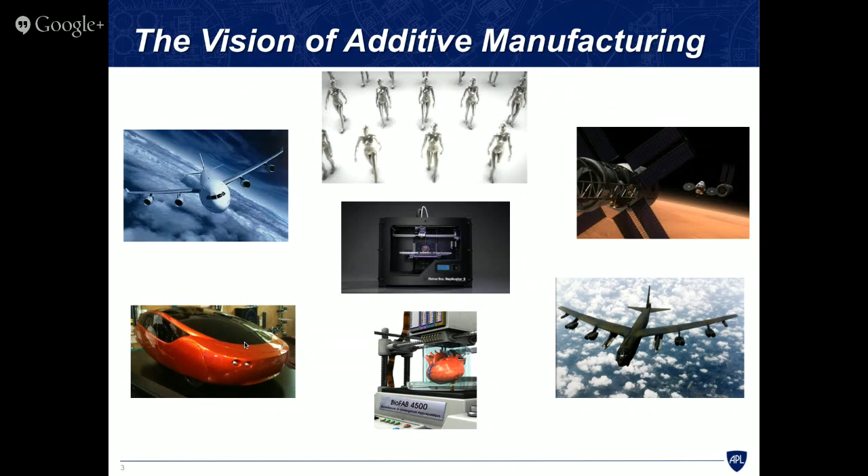And of course, my favorite is robots, right? People have talked about it—we're going to print robots. We're going to be able to print the exoskeleton, the circuitry, the outer skin, and the software all at once, all in the same machine. And when we're done, the robot's going to knock on the door and say, 'Let me out,' right? This is the vision, this is what people talk about when they say additive manufacturing. You don't have to look very far to see that this area gets significant media visibility.

This is actually a pretty old slide now, a couple of years old, but these were some of the things that were in the press, the popular press, and some of the trade journals, 3 and 4 years ago. You can look in the paper or on the net pretty much every day and see something new about additive manufacturing. It's getting significant visibility, and people are saying some pretty remarkable things.

Complexity is free, right? Doesn't matter how complex your part is, we can make it, no problem. One day we're going to print an engine, metal engine, no problem, we'll do it right here in the garage, right? We're going to go right from art to part. One of my favorites, I'll tell you later why I love that one so much. Or additive is the third industrial revolution. Well, what does that even mean?

So these are the types of things, and you've probably heard statements like this or similar statements about that. There's a lot of hype about additive manufacturing.

My favorite quote when it comes to additive manufacturing is this one from Jeremy Hsu, who had this in an article in Tech News Daily a few years ago, where he says, "The technology could end up affecting every major industry and have an even bigger impact on US manufacturing than the robot revolution." So think about that for a minute. Not just select industries, every single industry.

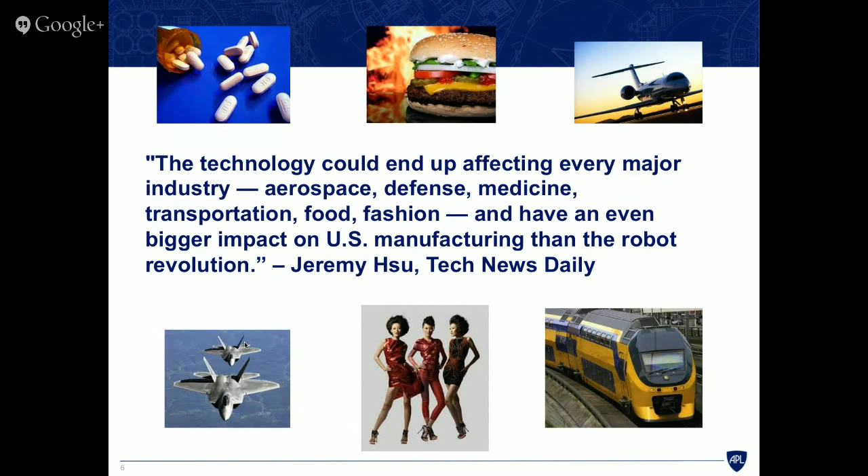And so if you were to think about it for a few minutes and come up with a list of those technologies in the past 200 or 300 years that have affected every single industry, you'd have a very short list. Electricity, the personal computer, the internet, okay, those types of things. How many things would be on that list? 5, 6 maybe, okay? Additive manufacturing has the potential to be listed with those other technologies.

And along with all the hype and the growing hype, we see a rapidly growing additive manufacturing industry. So if you look back a few years ago, in 2011, there were 1,600 articles published on additive manufacturing or 3D printing, okay? A year later, there were 10 times that. I don't have statistics on the last couple of years, but a 10-fold increase in just 1 year. For those of you who are familiar with Kickstarter, this is one of those crowd-funded projects. 3 of the top 10 Kickstarter projects are 3D printers.

The total additive market in 2009 was $1 billion, and 2 years ago, it was 3.1 billion. Now, a couple weeks ago, I had to update this slide, and I sort of chuckled when I looked at the predicted worldwide sales of products and services. So just 2 years ago, when I originally had this slide, they predicted that in 2016, it would be a $3 billion market. Well, we've already surpassed that. The new figure for 2016 is 7 billion. And for 2020, just a few years ago, they were predicting 5 billion, and now they're predicting $21 billion. So the market is growing very rapidly.

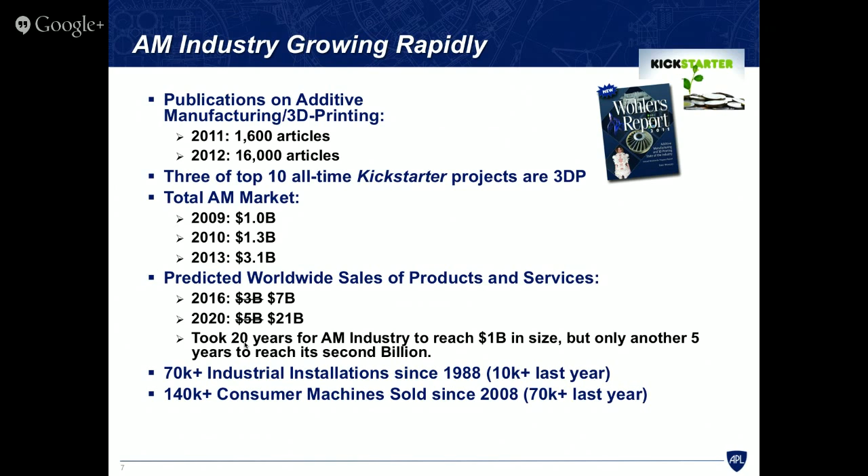It took 20 years for the industry to reach its first billion in size, but only another 5 to reach its second billion. And then if you look at the number of machines that are out there, there are 70,000 industrial machines that have been sold and installed since 1988. By industrial machines, we mean machines that cost more than $5,000. And of those 70,000, over 10,000 were just last year. Similarly, if you look at the consumer market, these are machines that are less than $5,000, the types you would buy yourself and have in your garage or basement. There have been 140,000 consumer machines sold since 2008, but over half of those were last year. So along with the hype, we see a very rapidly growing industry and market.

I like to show this as well. I don't know how many of you are familiar with the Gartner hype cycle, where he looks at various technologies and starts with an innovation trigger, a peak, what he calls a peak of inflated expectations, and then the trough of disillusionment, right? It's sort of when you wake up and realize what's going on. And then the slope of enlightenment that finally gets you to some stable plateau of productivity.

And he's put on here a few additive manufacturing or 3D printing technologies. 3D bioprinting systems is sort of on the rise right now, which I tend to agree with, although he says it's going to plateau in 5 to 10 years, which might be a little optimistic. And then over here on the enterprise 3D printing, which I think is referring to the more industrial systems, he says that we've already passed through this trough of disillusionment.

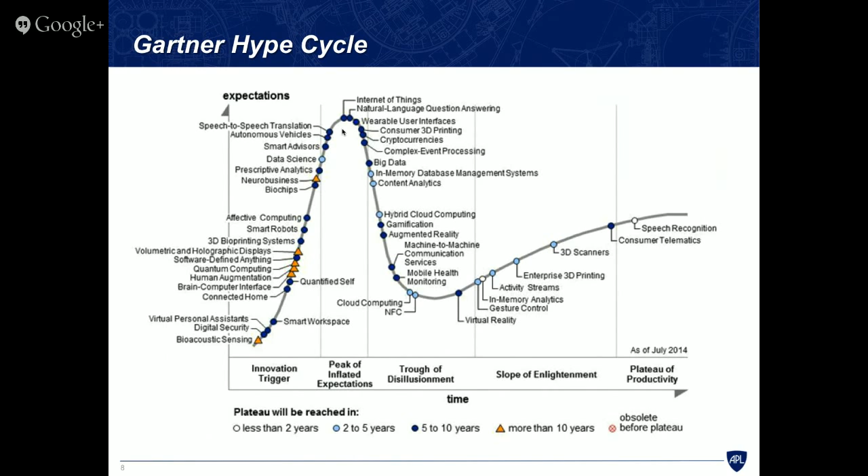It's going to be 2 to 5 years, which again, I think is a little bit optimistic. But the interesting one is up here: consumer 3D printing, where we're still very close to the peak. We still have a lot of hype, a lot of hopes and dreams for additive manufacturing or for 3D printing. So the question is, how bad is the crash going to be when some people are finally able to separate the hype from the reality?

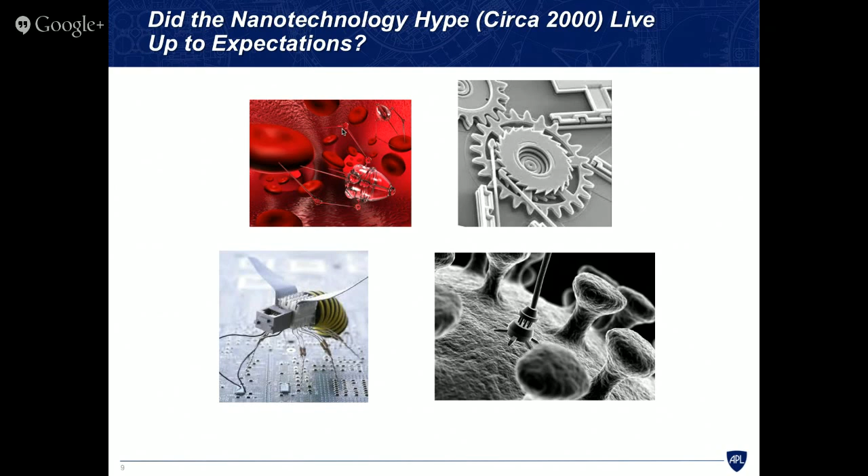And why do I worry about the hype? Because I was around in 2000 when there was another technology with a lot of hype, called nanotechnology. There were visions of robot flies that would fly around the room and everybody would have one. When you go to the doctor's office, he's going to put a little miniature submarine in your veins to do his diagnosis. And we're going to have these things really fast. They haven't materialized yet. That's not to say they won't materialize. Certainly people are still working on these things, and certainly they're possibilities, but they haven't happened yet, and it's already 15 years. So we need to be careful when we talk about the hype of additive manufacturing, that we don't disappoint people the same way some have been disappointed with nanotechnology.

Okay, so now that I've given the hype and all the hoopla that goes along with that, let's talk about what additive manufacturing is.

Traditionally, when you want to make something, you usually use a subtractive process. So in the case of a chess piece, you start with a chunk of something, maybe wood, maybe metal, and you cut away everything you don't want. Everything you cut away is scrap, chips and pieces like that. The limitation of a process like this is the physical cutting tool. You can't get that tool everywhere. You're limited in where you put that tool. You can't cut out an interior section of that part because you can't get your tool inside of the part.

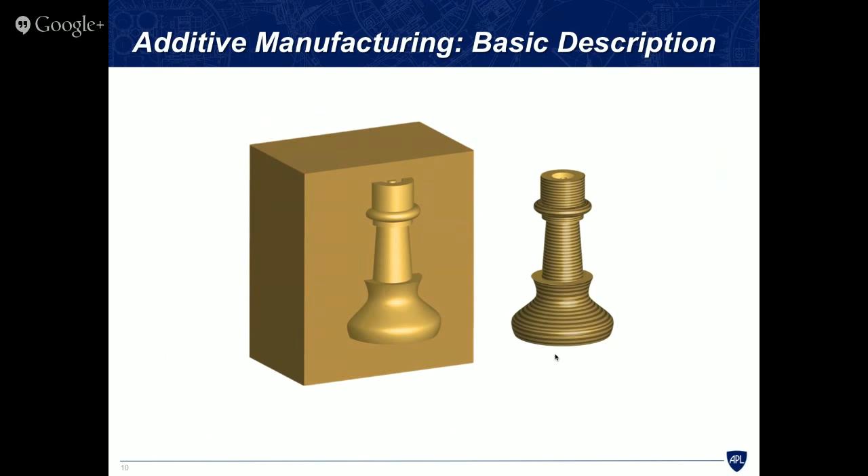Now, additive manufacturing does the opposite. Instead of cutting away material, we build up material one layer at a time. So if you have a complex part, as long as you can deconvolve it into layers, you can now make things with holes and cavities and other complex features that you wouldn't be able to make using a subtractive process.

Now, fortunately, we have an industry-accepted definition for what additive manufacturing is. Additive manufacturing, as defined by ASTM International, is a process of joining materials to make objects from 3D model data, usually layer upon layer, as opposed to subtractive manufacturing methodologies.

And so I hear people all the time say, oh, well, it's welding, or it's this other thing. Well, the two important distinguishers are: 3D model data drives the process, there's a direct link from a design into the process, and then layer upon layer. Certainly there are lots of other processes out there similar to additive manufacturing, but they probably don't have these two things together. Welding, for example, although similar and sharing some melting and cooling phenomena, is really a distinctive thing.

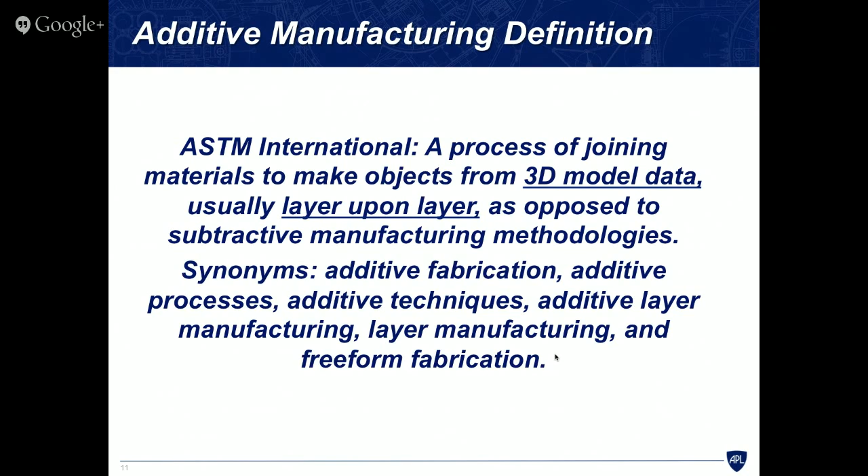3D printing, the wonderful, terrible term. 3D printing is also defined by ASTM International as the fabrication of objects through the deposition of a material using a printhead, nozzle, or another printer technology. So basically, if you have an additive manufacturing technology that has a printhead or a nozzle, if it looks like a printer, if it moves like a printer, if it smells like a printer, it's probably a 3D printer.

What gets confusing is that everyone, and by everyone I mean the popular press predominantly, uses 3D printing synonymously with additive manufacturing. It, in general, refers to processes that are low-end in price or overall capability.

So why is this a wonderful, terrible term? The term is wonderful because everyone can conceptualize what 3D printing is. I know what 3D is, I have a printer, add them together, 3D printing. I know what that means. I can conceptualize that.

The problem is that when you start using the term 3D printing synonymously with everything, you confuse people's expectations. So you see something in the newspaper that says we're going to 3D print a metal jet engine. No, you're not. You're going to make it perhaps with metal additive manufacturing, but you're certainly not going to 3D print it.

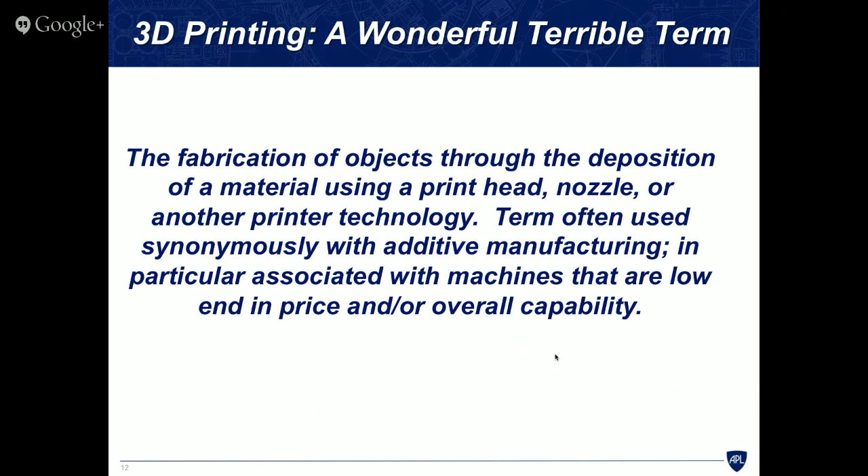This is something I get on my soapbox about, apologies, but I hope you'll help me with this. The next time you're at a cocktail party and someone says, hey, have you heard about this great thing, 3D printing? Your proper response is, oh, you mean additive manufacturing. Help me with my quest to use the right terms here.

So to further beat the dead horse on this, I've put together something that I think helps clarify for people the difference between 3D printing and additive manufacturing. If you look at part quality and functionality as a function of three things that all happen to scale the same way - system costs, infrastructure requirements for the machine, and level of expertise required - you get a picture that looks like this. For those consumer systems that you can buy for use at home, let's call those 3D printers.

The costs are very modest. You don't have much in the way of infrastructure requirements - you can just plug it into your wall outlet. The level of expertise is very low; anyone can do it. A high school student, a grade level student - pretty much anyone can run these machines.

Now if you start getting into the more... but the result is that you sort of get what you pay for, right? The parts are of lower quality and lower functionality.

Now if you move up into the additive manufacturing polymer sphere, the systems are more expensive - tens of thousands of dollars, hundreds of thousands of dollars. The infrastructure requirements are a little more significant; you can't just plug it into the wall, you probably need high voltage, and you might need ancillary systems to deal with the lasers in your device or other things for post-processing. The level of expertise is going to be a little more sophisticated too. It might be easy to run the machine - maybe a college student can do it - but there might also be other expertise needed that goes along with that.

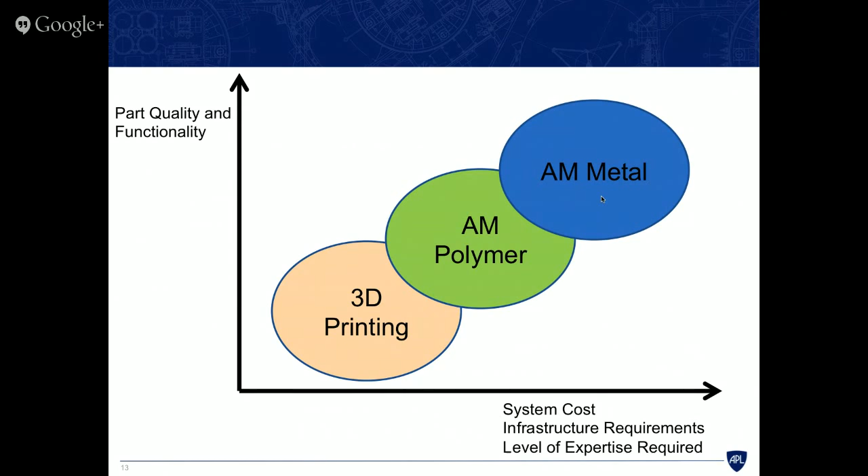And the level of expertise, again, it's not necessarily hard to run the machines - if I can run the machine, anyone can run the machine. If you can run a CNC machine, you can probably run one of these. But you still need expertise to decide what process parameters to use and what type of post-processing treatments to apply. So I hope I've convinced you that there is a difference between 3D printing and additive manufacturing.

So we're fortunate in that the ASTM also defines for us the seven different types of processes. We have definitions for these: binder jetting, directed energy deposition, material extrusion. Here's where we get a little more confusion, because a lot of people refer to vendor trademark machines as processes, and they're not really processes. So fused deposition modeling - that's by one company - is actually a material extrusion process. We also have material jetting, powder bed fusion, and some synonyms people use to associate with particular machines: sheet lamination and vat photopolymerization.

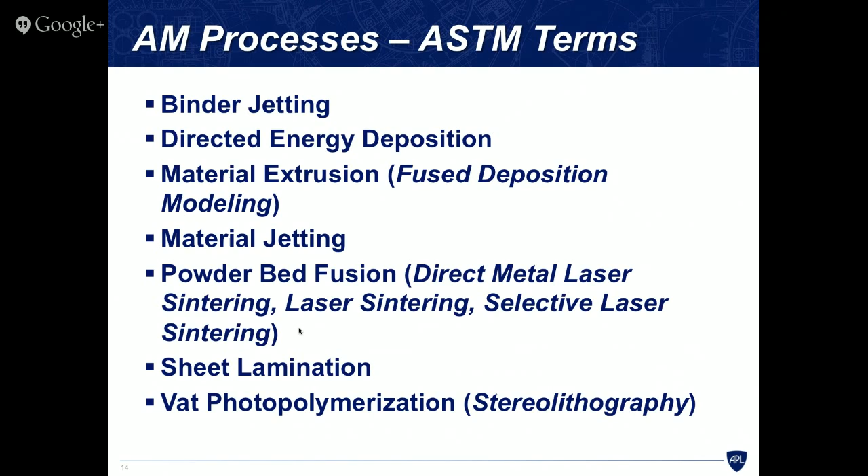I have a slide for each of these, and I'm going to go through them very quickly. The key point for all of these processes is just to keep in mind that it's data-driven - remember, we have some CAD or digital design that drives our process, and we're doing things layer by layer. Everything else is just detail.

So the binder jetting process is one in which you have a bed of powder - this is a part being built, so we're in the middle of the build - and you have some type of windshield wiper or roller, and you spread a layer of powder over your part, and then you use a 3D printer type head to deposit binder or glue.

Okay, so for each layer, you're gluing together your particles. And then what you end up with when you're done is a very fragile green part. You can do this for polymer, for metal, for a variety of materials, but you end up with a very green part, and you usually have to do some significant post-processing to get a part that won't fall apart in your hands.

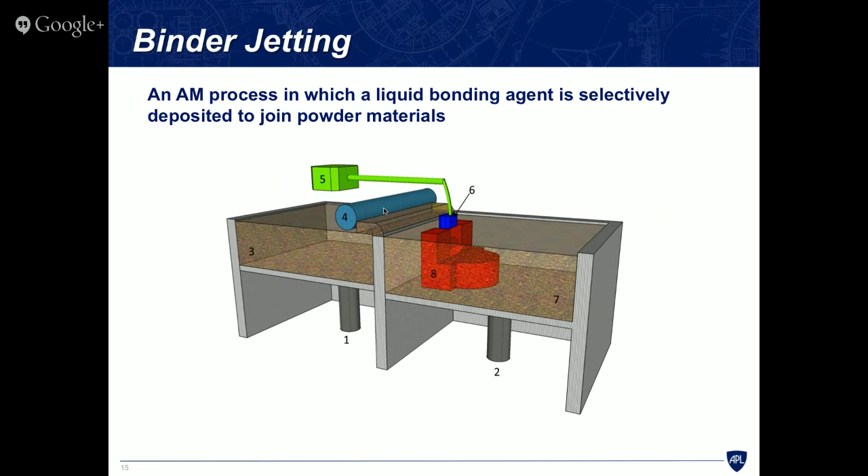Directed energy deposition is generally associated with metal powder. In this case, we have an energy source from above, and we're looking at things from the side here. Here's our part, and here's our molten metal. The energy source could be a laser or an electron beam, and we're feeding either wire or blowing powder into this heat zone, then moving it. So we're actually depositing material and melting it on the fly. That's how directed energy deposition systems work.

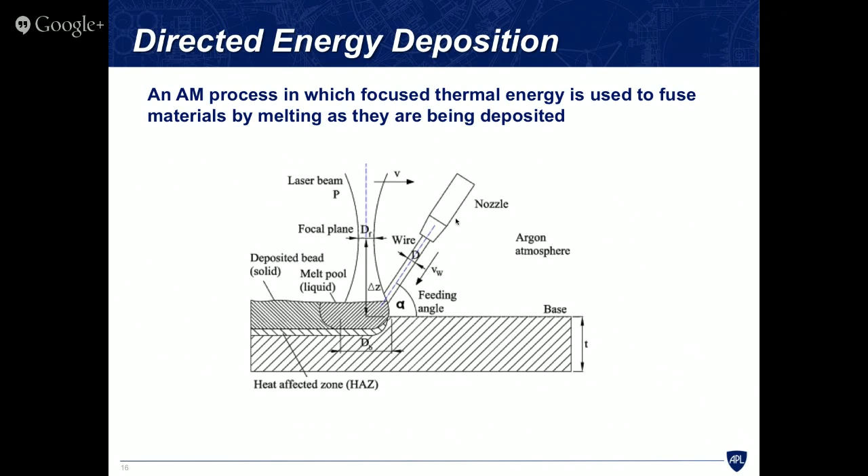They work pretty well. They're good for repair. If you have an existing part that maybe has some cracks, or you want to put a new surface on it, it works great for that. The feature resolution is not so good with a system like this.

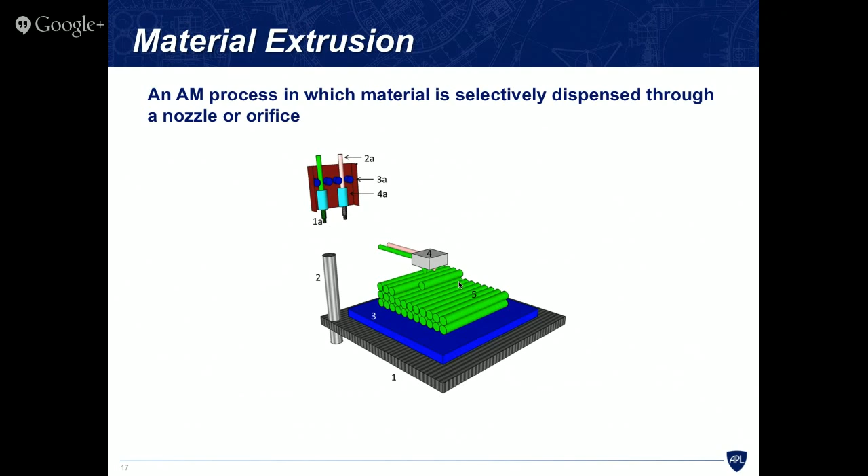Then we have material extrusion. This is what the MakerBots of the world do, as well as some more expensive industrial systems. In this case, you have something that looks and smells and tastes like a print head, and you go back and forth, depositing molten polymer to build up your part layer by layer. This is a very popular process in additive manufacturing.

Material jetting is very similar, except you're just depositing stuff, squeezing it through the tube, like a tube of toothpaste, and it's generally a photopolymer or wax.

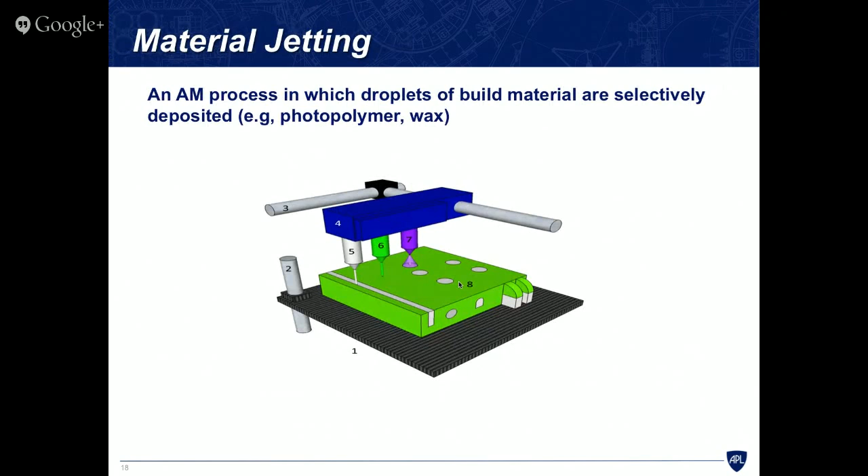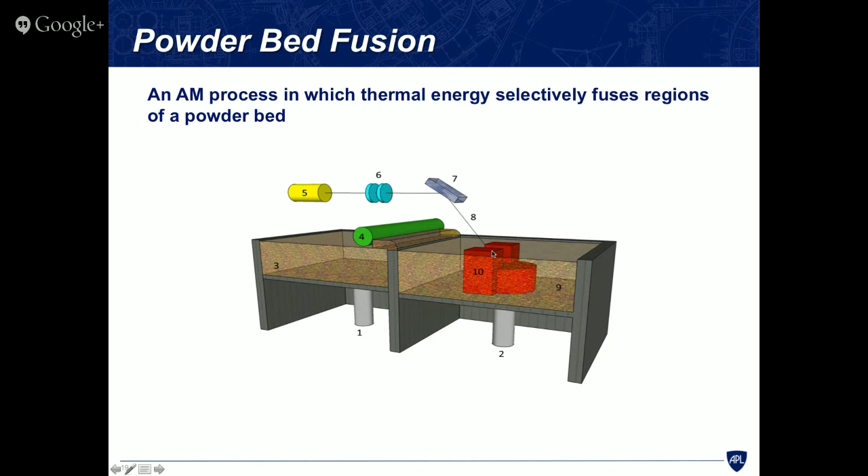Powder bed fusion, this is my favorite. This is the one I'm most involved with. This process gives you parts of the highest quality and highest dimensional control. It's similar to the binder jet process, where we have a powder bed over here and a reservoir of powder, and we scrape the powder across the part, then use a laser to just melt that portion of the powder that corresponds to that layer of the part. This is a very nice, very good process.

Sheet lamination, I don't know very much about this. This is not a very popular process. In this case, you're using energy to basically get sheets of material to stick together, and then using a laser or something else to cut out the proper shape for each layer.

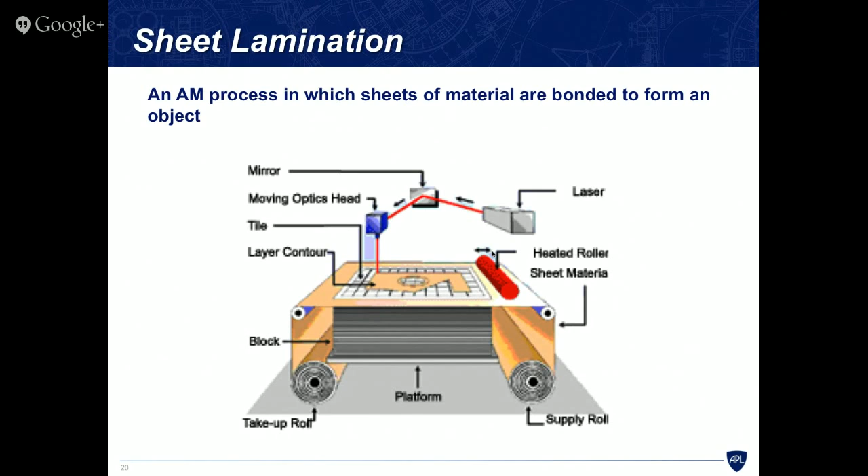And then finally, vat photopolymerization. This is a process in which you're depositing a fluid, a liquid photopolymer, and then you activate it through light, either ultraviolet or some other wavelength, to solidify that liquid. So those are the 7 processes very quickly.

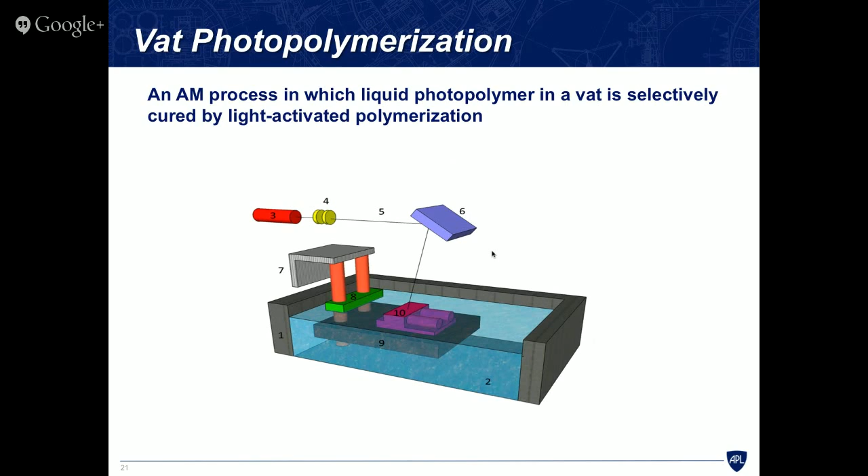But why do we care about these? Why is this so great? Well, as I mentioned, we're able to realize complex structures and complex geometries, and make parts that have internal features. It's a highly customizable process. So if you have a base part and want to customize it, say it's a medical part, for a variety of people with different sizes and shapes, it's very easy to do. The overall production time is very short compared to traditional processes.

We don't have to worry about tooling or customized fixtures or path planning. This is really important if you have design changes. Traditionally, if you have a design made subtractively, you have to come up with your tooling and fixtures, how you're going to orient and hold it, then plan how you're going to cut away material. When you're done, you take that to the designer, and they say it's good, but not quite right - here's a new design. So you have to scrap your tooling and fixtures and redo your path planning. If you do that enough times, you get really frustrated and it takes a long time. But with additive, because we can go almost directly from our digital design to our part, we don't have to worry about tooling or fixtures. So it's very fast and easy to make design changes.

We can produce multiple parts in one build. There's an example up here, a build plate from a machine, and you can see it's not just one type of part. It's a variety of parts all being made at once. So you're really only limited by your build volume.

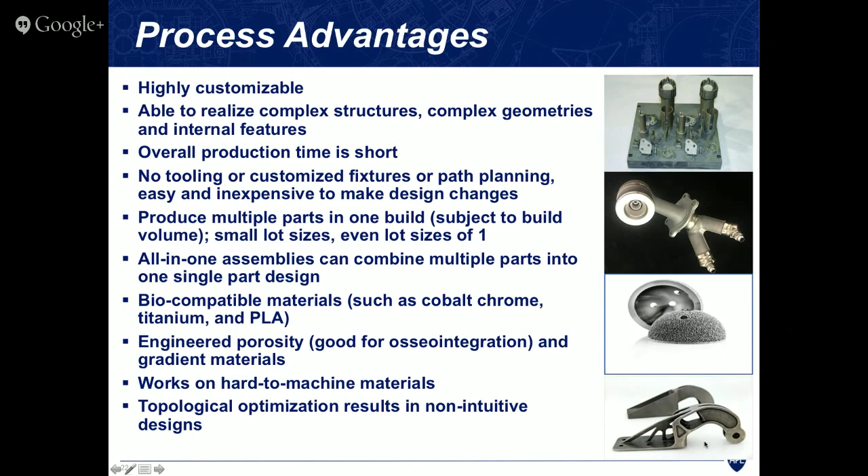And then we can also do topological optimization, like this bracket here, which is an Airbus design. This is the traditional part back here. You can optimize that part to remove a lot of the material and get rid of a lot of the mass, but still keep the strength and the stiffness. So, another advantage - those are all the advantages of additive manufacturing.

Now I need to go through this quickly since we're talking about hype and reality - some of these things that people are saying about additive manufacturing. Complexity is free, we can produce anything, right? Well, complexity is not free. It's certainly inexpensive. We can't make everything additively, but we can make many things.

Art to part, meaning there's a direct path from your CAD design to your part - almost, not quite. We usually have to do some intermediate steps. We need to slice that part into layers, or add support structures that we're going to need during the build, or things like that. So it's not quite art to part, it's almost.

Additive manufacturing is fast. Well, since we don't have to worry about tooling and fixtures and path planning, the entire production cycle from concept to part is relatively fast. The unit process is actually pretty slow - when we're using additive manufacturing machines, it usually takes a fraction of a day or several days to make a part. So the process itself is slow, but the overall production cycle is pretty fast.

Additive is a push-button technology. Certainly, once you've got a job set up, if you know what you're doing in terms of selecting your parameters and your post-processing, it's not too hard to run the machine. But there's a lot more than just pushing the button on the machine.

Some people say that additive is greener than conventional manufacturing, and my answer to that is maybe. We don't have a lot of data on this. It also depends on how much of the manufacturing cycle you include in that calculation - do you start with the production of the material you're going to feed into the machine, or do you start with the unit process? So we need more information on that.

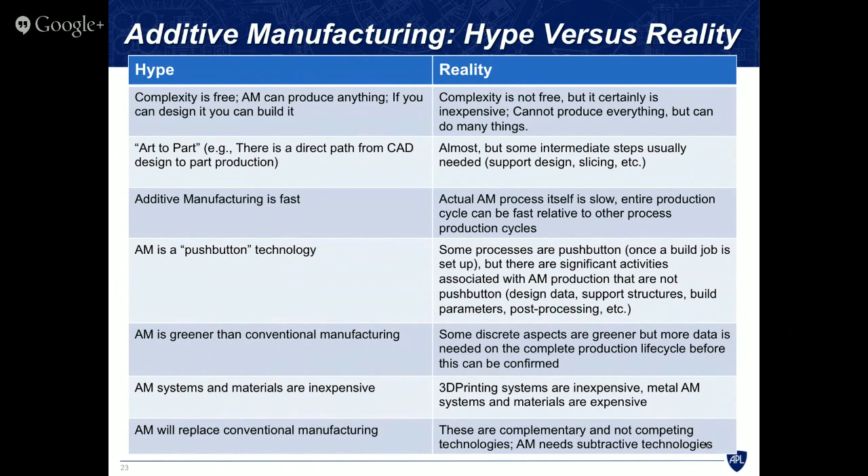We're not going to have jobs. Well, not quite. Remember, additive can't do everything, but they're complementary. Additive technologies need subtractive technologies to help with finishing, machining, build plate conditioning, and other things. So at least in my lifetime, additive technologies are not going to replace conventional manufacturing.

Just quickly, since we're talking about it, this compares some aspects of traditional subtractive manufacturing with additive manufacturing. You can see that the rate at which we do things, the rate of removal, is much faster on a traditional machine than on an additive machine.

Path planning is really about the same. You can get third-party software to help with path planning. On additive machines, that's just part of the machine—it happens automatically. Fixtures and tooling are required for traditional machines, not required for additive.

The material costs are very different. If you're talking about stainless steel, you can probably buy that conventionally for about $5 a kilogram, but whatever you cut away is wasted—you can't recover those chips and use them again. On the additive side, we can buy stainless steel powder for about $140 per kilogram, but whatever we don't use, we can recycle and use again. So there's very little waste in an additive process.

Mechanical properties we'll talk about in a second—basically they're comparable with some caveats. We already talked about design changes and some other challenges. You could have excessive tool wear with traditional processes. In additive processes, we have fun with things like thermal stress, process variability, and overhangs.

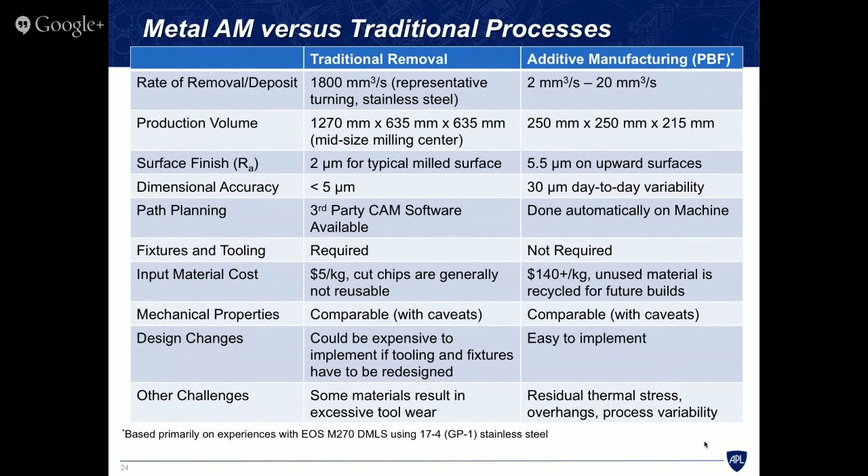Another key point: just because you can make something additively doesn't mean you necessarily should. Here are some examples. If you're just interested in a metal plate with some holes in it, you're probably not going to make that part additively—it would take a long time and there's nothing complex about this part.

Similarly, if you're mass producing something like screw threads in vast quantities, there's nothing particular about this part that lends itself to additive. Certainly, mass production is difficult with additive. But things that have complex structures, internal structures, or are assemblies of other parts, things that are highly customized, such as these bioimplants—those are good candidates.

What about this part? What about these little army guys? Well, you probably wouldn't print those additively, but you could make the tooling for that—you could make a mold for that additively that you would use for injection molding. It's a complex part with a lot of features. You can make the mold for that additively and then let another process use it.

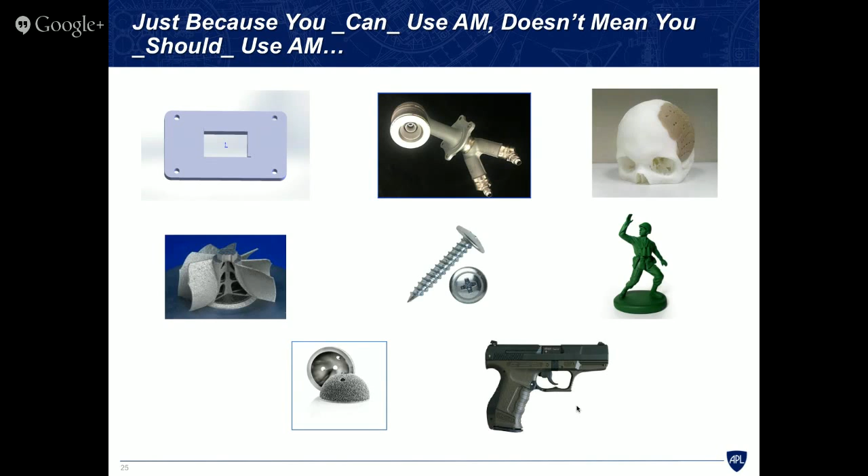What about guns? This is always my favorite. Certainly you could make a gun additively—people have made guns additively. But additive manufacturing is a stupid way to make a gun because it takes too long and it's too expensive. It's easier to buy a gun on the street than to make one additively. People have demonstrated this, you can do it, but it's not a very good use of additive manufacturing.

So we've pontificated about how great additive manufacturing is, right? So why aren't these great visions and dreams that people have showing up today? Well, there's a number of technical challenges, and now we're focusing mostly on metal because that's what I do—all the cool kids do metal additive manufacturing. So there are a number of challenges and needs associated with metal additive manufacturing.

Related to material properties, related to understanding the process—it turns out we don't really understand the process very well, because it's very difficult to measure. This happens very fast, with temperatures changing by tens of thousands of degrees per second or more, over a very small area. So it's a very difficult process to measure. We have some standards, but not very many. We don't know how to qualify and certify these parts easily, which is why you don't see many examples on planes yet.

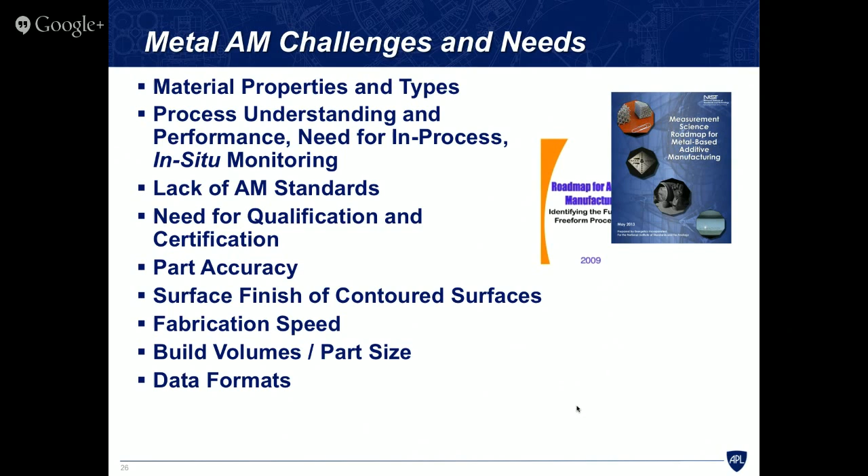And as we talked about earlier, part accuracy, surface finish, and speeds are also all challenges.

I want to show you an example of thermal stress. This is a real part, a test artifact that we built while I was at the National Institute of Standards and Technology, just to show you that residual stresses in these parts are real and can be significant.

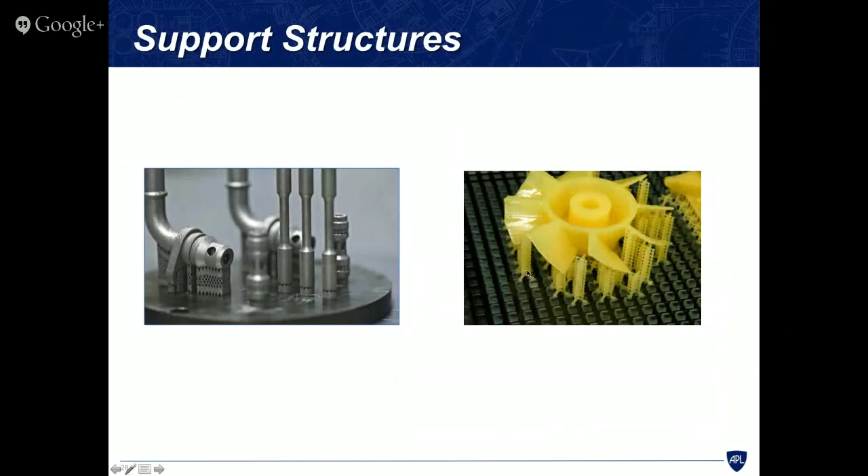So we have a build plate here, and our part is fused to this build plate. This is after the part has been done. You have these support structures that help hold the part, things like this. These are aspects you add to your part to hold it to the build plate, especially in cases where you have overhangs or things that might sag during a build.

But in this case, we did not make the support strong enough, and the residual stress in the part was too great, and it bent up a corner. This is a metal part, by the way.

The most extreme case I've seen is when we made some huge cobalt chrome parts. Different materials stress differently - some aren't so bad, some are pretty bad. Cobalt chrome is really bad. So we were doing big chunks of cobalt chrome, and we had it fused to this build plate.

My colleague calls me up in my office and says, I can't unscrew the build plate. I said, what do you mean? He says, I can't get it loosened. I said, did you eat breakfast? Are you sure you can do that? He said, I can't get it loose.

So I have to go all the way across campus to the lab, and I get there with a screwdriver. We get a little wrench, then a much bigger wrench. It's not budging. So we popped the heads off of the screws and took out this 10 inches by 10 inches, 1 inch thick steel build plate, put it on the table, held down one corner, and the other corner was up by 5 millimeters.

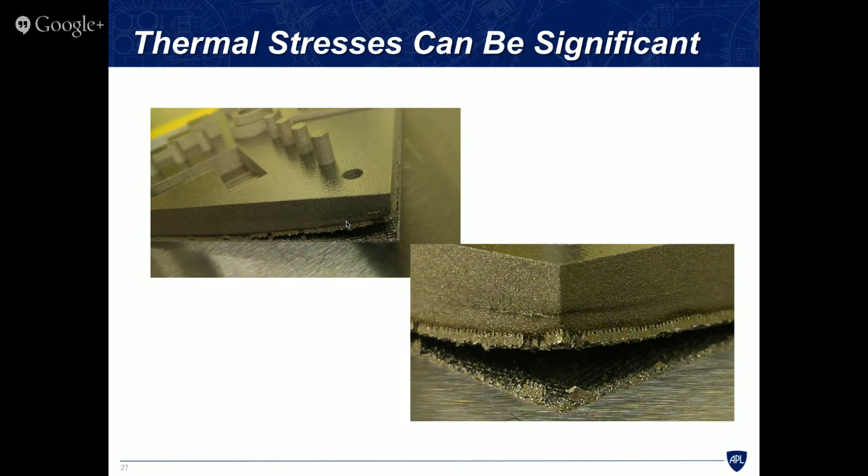That's how much residual stress was in this plate. We ruined the build plate. We called up the vendor and said, hey, this happened. He goes, yeah, it happens sometimes. So the stresses can be significant.

People always ask, well, what about material properties? You've got your newfangled additive manufacturing, right? How do the material properties compare to a casting or a forging? So here's some data that we took while I was at NIST.

What we did is we built a series of tensile bars - a standard thing for engineers to do. We built them horizontally along the build plate, and we also built them vertically. Of course you would expect intuitively that the bars built horizontally, that you pull this way, are going to be stronger than the ones built vertically. And that actually is the case.

The horizontal bars with no heat treatment afterwards, compared to the vertical bars, show tensile strength differing by about 10%. But we reserved half of the samples and did a heat treat on those to try to improve the mechanical properties. Not only did the mechanical properties improve, but this difference became much smaller.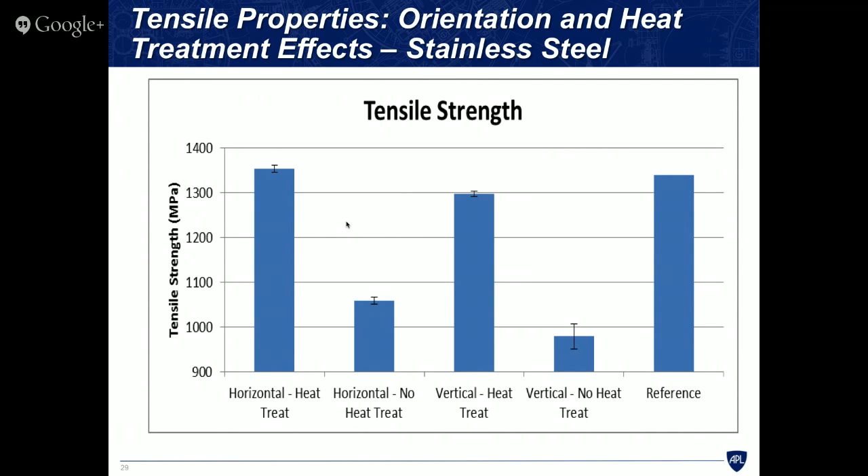If you look at the horizontal heat treated specimens and compare them to a traditional casting or forging, you'll see the properties are the same or even better. This is repeated over and over in the literature - it's not just us with stainless steel, but others have done this for other materials and seen similar trends. So the answer is, if you do your orientation properly and your heat treatment properly, you can get properties very similar to a casting or forging.

I talked a little bit about variability in additive manufacturing. Here's a case where we did a study at NIST a number of years ago, where we had several groups that all had the same machine, same model, same process parameters. We provided everybody with the same powder and the same design file and asked them to build tensile bars. So to the degree that we could control it, everything was the same. They sent the tensile bars back to us, and we did the post-processing and the testing.

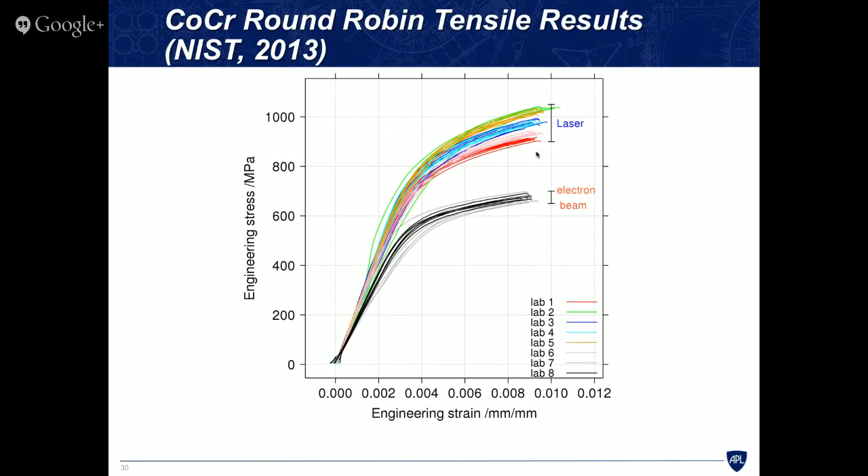If you focus on these systems, you'll see there's quite a bit of variability between the five different labs that had the same systems and kept everything the same. You can further see this if you look at some mechanical properties, like ultimate tensile strength—focus just on the blue, because those are the systems that are the same. Ultimate tensile strength looks about the same, but the yield strength is all over the place, elongation is all over the place, and Young's modulus has quite a bit of variability too. So we don't really understand this system.

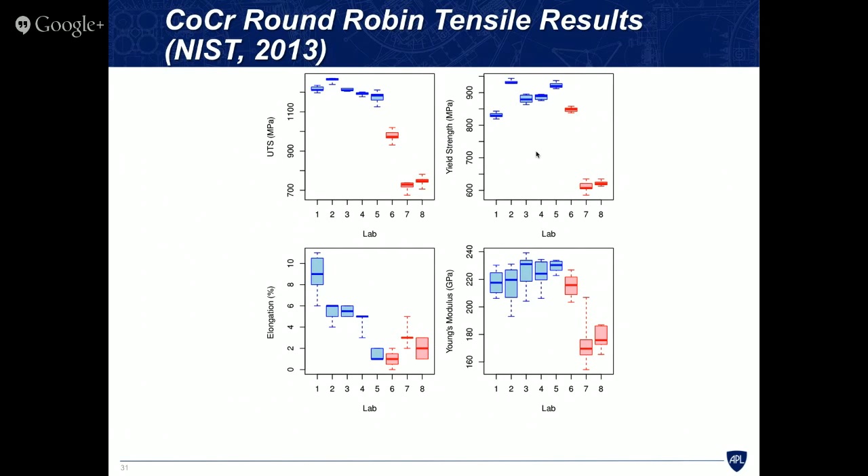There is still some variability. This is one reason why it's difficult to qualify metal additive parts for aerospace. We thought we did everything the same—certainly we controlled everything within our control to be the same, but we still had some variability.

So what's the future? We've talked about the hype, we've talked about the vision. What's the future? Well, the good thing about the future is—does anyone know who this is? There's Niels Bohr, who knows something about predicting the future when it comes to quantum mechanics. Prediction is very difficult, especially when you're dealing with the future. So how are we going to predict the future?

Well, what we can do is look at some impressive examples of additive manufacturing today, and from that, perhaps you can make some educated guesses about what might or might not be possible in the future. So let's go through a number of areas quickly.

Consumer goods: a lot of attention is being put on the consumer market—the lower quality machines, or maybe the mid-level polymer machines. People are doing some pretty neat things. Nike had a new shoe design for their sprinters that was made additively. This design helped them stay in a low position longer coming out of the starting blocks, which shaved time off their races. People have also done jewelry and camera cases.

People have done, or tried to do, cars—polymer cars, made additively. There's also a dress that was highly custom. Talk about customized—it would only fit this one person. It's made of 60 or so different polymer pieces that all fit together. It's not going to fit anyone else.

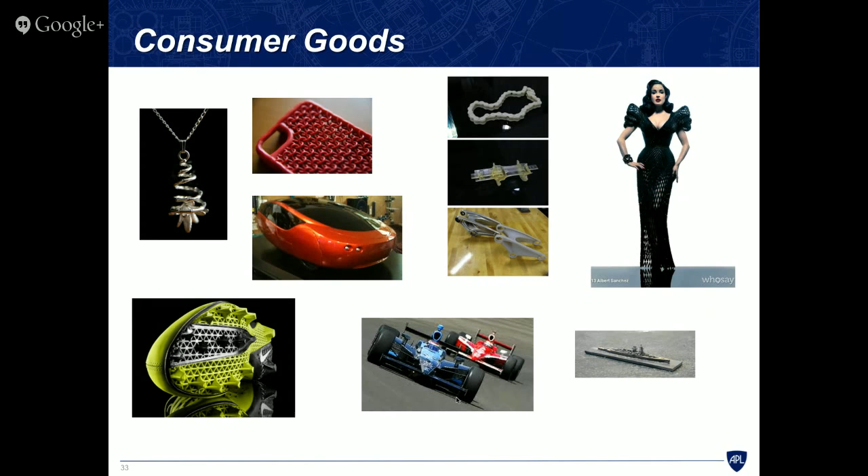I apologize, a race car is not really a consumer good, but I didn't have another slide to put this on. People are using metal additive manufacturing for highly complex and customized engine components in NASCAR or Indy type cars. So on the consumer goods side, you can see there are lots of different examples of relatively simple, inexpensive things being done.

Everyone here watches Big Bang Theory, right? No? Oh my God. Do some of you watch Big Bang Theory? Okay, thank you. If you're a scientist or engineer, I think you have to watch Big Bang Theory. This episode was actually shown yesterday on a rerun. For those who know it, this is the Wolowitz Zero Gravity Waste Disposal System, or as Raj would say, it's a space toilet. In this episode, one of the funnier ones, Wolowitz realizes his space toilet design, which is up on the International Space Station, has a flaw, and they're going to have a problem. And if you're on the International Space Station, you don't want a problem with the space toilet, right?

Well, guess what—on the International Space Station, they had a problem with the space toilet not too long ago. Up on the Station, they don't have a lot of room for inventory or spare parts, so you don't necessarily have a new part you can just pull off the shelf and stick in the toilet to fix it. So what do you do? Well, you have to wait for the next supply mission, or maybe jury-rig a solution. But wouldn't it be great if there was a 3D printer up on the International Space Station?

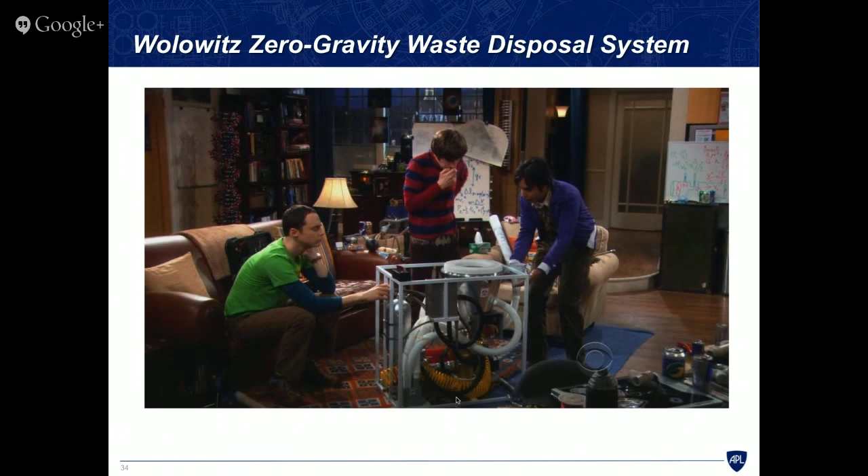As a matter of fact, NASA last October put a 3D printer on the International Space Station. This is a very modest system with a very small build volume—it could build parts about the size of a deck of cards or so. But they're using it, they're testing it. The Europeans got jealous.

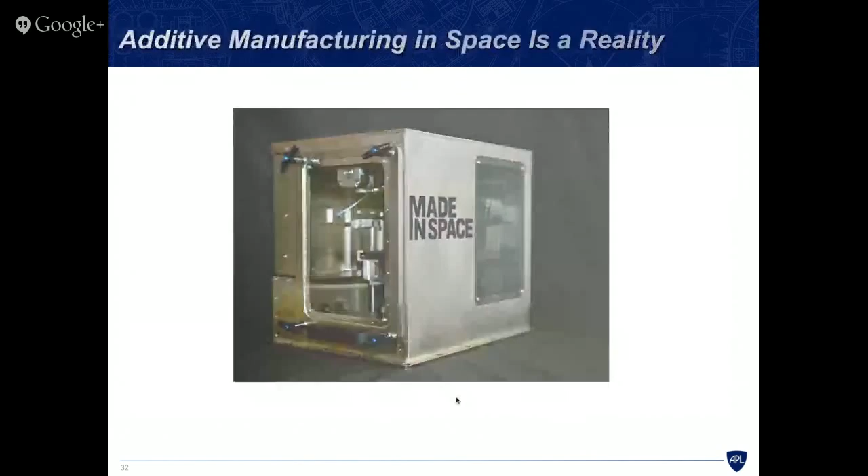They wanted to try this too, so they're going to send up their own version of this printer, or perhaps they already have. You can imagine in outer space, like we talked about earlier, if you're on a manned deep space mission, you need a part, you can't carry them all, you can't pull over to the side of the road. It'd be great if you could have this type of capability.

I think the next gen Mars rover is slated to have 20 or so different additive parts on it.

I teased earlier about this GE aircraft fuel nozzle. This is going into production very shortly. They've already flown this on a test flight. This is a part that was made traditionally out of 20 different components. Now it's a one-piece design. It has internal features that allow for better mixing of the air with the fuel. It's a more reliable part, it's a lighter part, it has less bad forms of oxides coming out of it, and it's more fuel efficient. So this is a great example of an additive part.

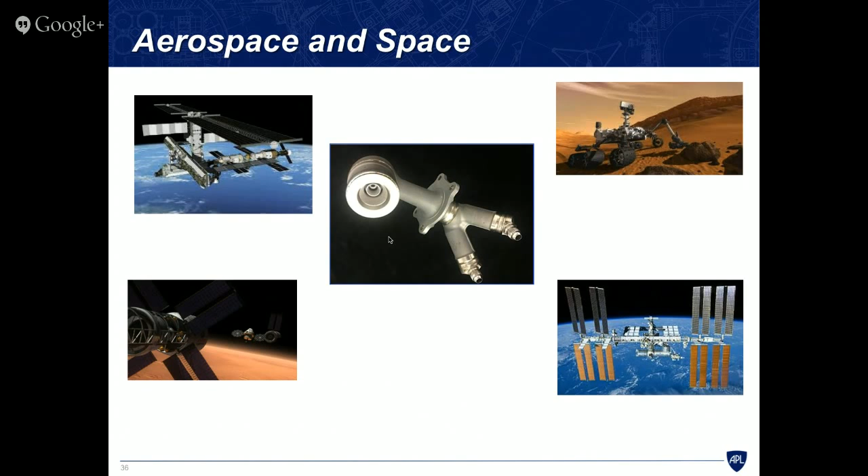Now, of course, GE aircraft engines has spent 10 years and millions of dollars developing this part. But this is a good example of the types of things we should be able to see in the very near future, more routinely.

Yes, people are using 3D printers to print food, noodles and chocolates. Not only chocolates, but there are some people who will scan your face and then print it out in chocolate, and then you can eat yourself, I guess. This is really happening. Chefs are doing this. There are also some people using cellular material to print something that looks and feels and tastes like meat, even though it might not really be meat. It might have the same nutritional value, looks and smells and tastes like meat.

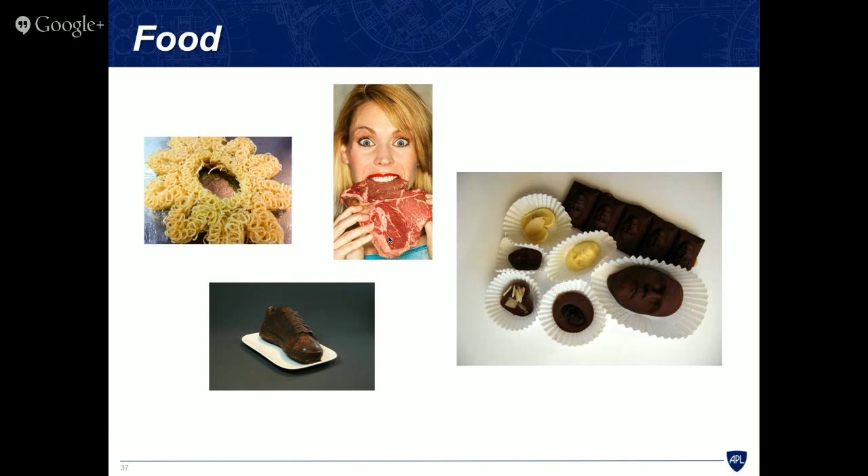Now you think, would you want to do this? Remember, Gene Roddenberry has this vision for the future of what the Earth would look like. You can imagine if you could develop this technology for places where there isn't a lot of food, now we're having a real positive impact with something like this. But in the meantime, we'll just stick to the fun things, like printing our faces in chocolate.

Home fab is taking off. I showed you earlier, 140,000 systems sold in the last 7 years, over half of them sold just last year. It's a booming market. The one issue with this is that not everyone is a designer. So lots of people can run these machines, but not many people can design parts for them, not many people know how to use CAD. But thankfully, there are websites out there where people upload designs for free, and there are thousands and thousands of designs up there.

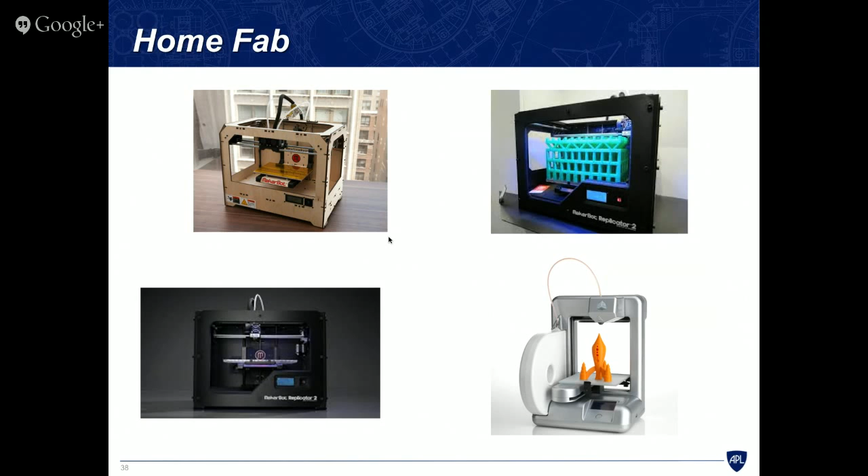So what does the future look like for this? Well, you can imagine maybe in the future something in your house breaks, maybe a shower curtain rod, or a paper towel holder or something like that, and you really don't want to have to schlep all the way down to Home Depot to get one. You spend 99 cents online, you download a file design, and you print it up in a few minutes. That's sort of the vision.

Models for surgical planning and reference have really taken off in the last couple of years. There have been a lot of really interesting and useful examples where doctors are taking CAT scan or CT data and printing up models. This is useful in several different ways. It's useful for surgical planning so that you can get your equipment in order before it comes into the operating room, and if you do that, you can reduce the amount of time your patient is under anesthesia. You can use these models for reference during a procedure, or before a procedure, or in the case of conjoined twins, where the doctors needed to know which blood vessels and other structures were being shared. That's a very useful thing to do.

It's also being used in an empowerment way. There have been people who have printed up their cancer tumors before and after treatment, to help them understand what's going on, help them feel like they're part of the recovery, part of the process.

There was an interesting case a couple years ago of a gentleman who was injured over a decade ago. He broke his jaw, and the doctors thought they had fixed it and he had recovered, but he kept having recurring pain, and he kept going to doctors over and over again, and they couldn't figure out what was wrong.

So he was a bit of a tinkerer. He had a 3D printer. He had the CAT scan data, and he printed up a 3D model of his jaw, and he looked at it and rotated it, and he thought he saw something. He took the 3D model to his doctor and said, 'What's this?' And the doctor said, 'Oh, that's why you've got the pain.'

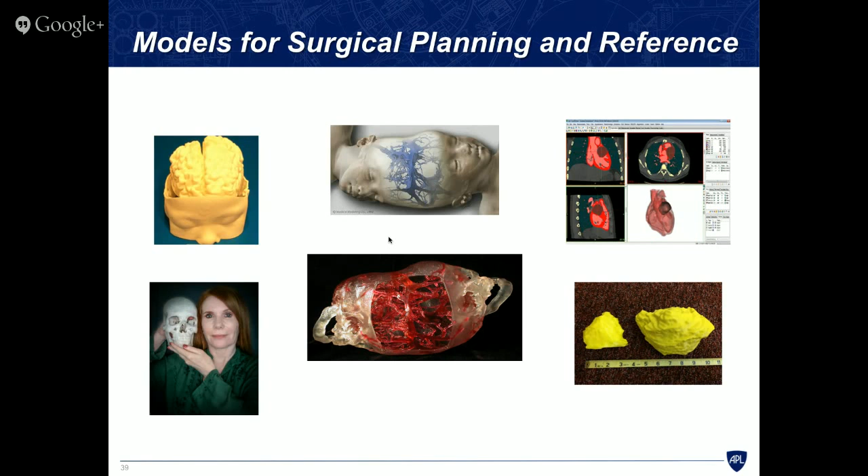You don't really think about this, but we live in a 3D world. We don't always see everything that we need to see in a 2D representation. But with 3D models, people are seeing more, and it's really remarkable. I expect to see a lot more of this in the future.

Biomedical implants, for soldiers and veterans who have traumatic brain injuries, there are already examples of both metal and polymer skull implants to cover up holes in the skull. Some of that work is being done at Walter Reed.

Also, as I mentioned earlier, joint replacements. I don't think there are many instances of this yet in humans. There are lots of cases of this in pets, dogs and cats, getting metal additive joint replacements. In England, not too long ago, there was an elderly woman who had her jaw replaced with an additively manufactured titanium jaw.

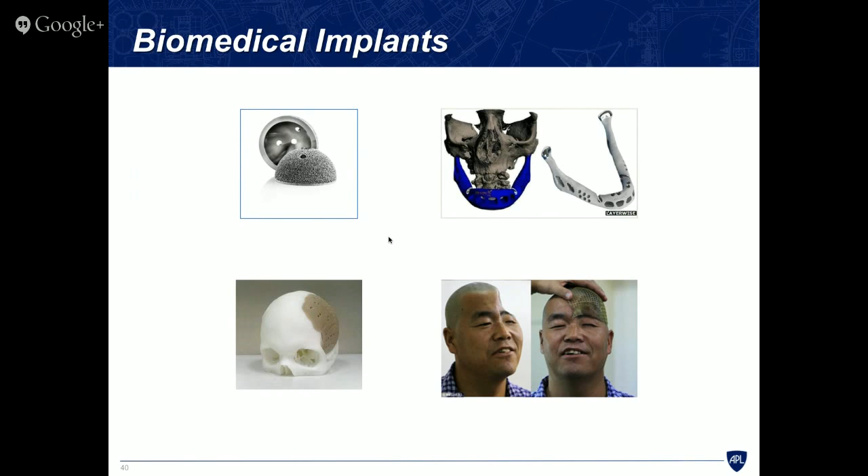This poor fellow, true story, was a construction worker in China. He fell off some scaffolding and landed on his head. You can see the type of injury he had. That injury left him unable to speak. So they designed a customized implant and implanted it in his skull. The thinking is that his brain will now be able to expand back to more or less its proper size, and they are hoping that his speech will return.

So lots of examples of biomedical implants. There's also lots of hype about tissue printing, biological tissue printing, so printing cell structures into collagen or into some other structure that you print additively.

There are some examples of this at the research level for people to print up bone structures or to print up replacement facial tissues or ears. There's actually a very nice... the ultimate vision, of course, is to do hearts and livers and kidneys and things like that. We're still quite a ways off from that. But people have printed these tissues before, recently.

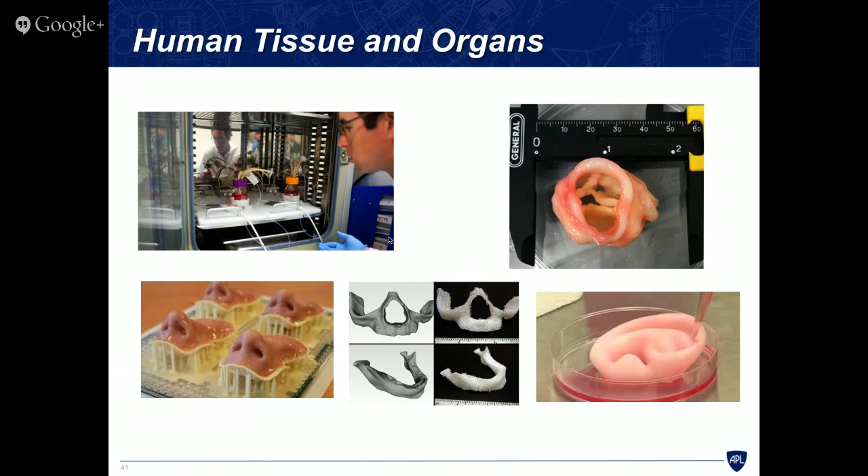In the case of liver tissue, it has been printed, and liver tissue that you print—it's not my area of expertise, but my understanding is that that tissue will stay viable much longer than tissue that you take from a biopsy. So what would you do with liver tissue? Well, you can use it for toxicology testing. So if you have medicine, instead of doing a trial, you can test it on the tissue itself and see what the reaction is. Obviously that's a much better situation than doing a human trial. So lots of exciting developments and also opportunities for human tissue.

So I thank you for your attention. Let me get to the conclusions. Clearly, the vision for additive manufacturing is very imaginative. We do have some technical challenges that we have to overcome if we want this technology to be more widespread and pervasive. The market, I think I showed you, is growing very quickly.

We have some very impressive niche applications reported so far, but be careful when you listen to things, when they call everything 3D printing. Scrutinize what you hear. When you read these articles, when you hear things in the news, make sure—there's a lot of hoopla out there—so make sure you scrutinize it and understand what they're really presenting, because sometimes they don't get it right on the reporting side.

And I personally have had a drink of the Kool-Aid. I'm a believer. Additive manufacturing will be a significant disruptive technology. We've already seen that it's slowly becoming that. It certainly will be a very significant disruptive technology in the future. So I thank you for your attention, and I'll be happy to take any questions that you have.

Okay, I have a couple of questions. Yeah, so now you... I'm sorry, easy questions only.

Now you have printed it, so can you test it? And a couple of questions—what about the materials? And you're talking about volume, before you print it, what's the ratio of volume to the product? And then there's biocompatibility issues for human parts and surface structure.